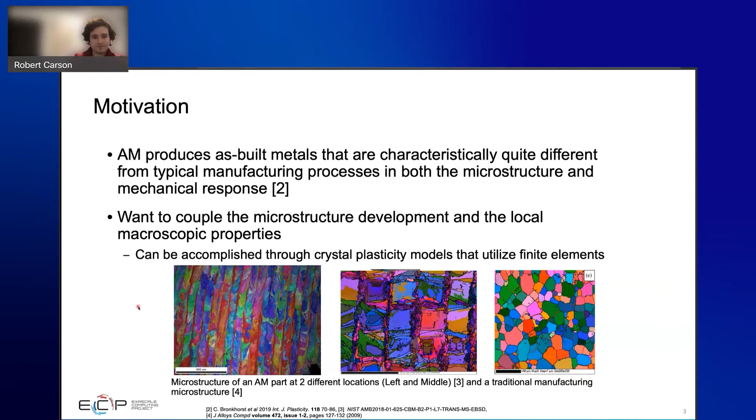And we are able to calculate those using micromechanical type models. And from our local properties, how that affects our part scale builds and the responses from there. So the overall goal, eventually once we have this kind of workflow, is to also help the qualification of AM parts. That's the long-term goal of these set of tools that we're building. So we're hopeful that we're able to get there with the new exascale computers that are going to be coming online.

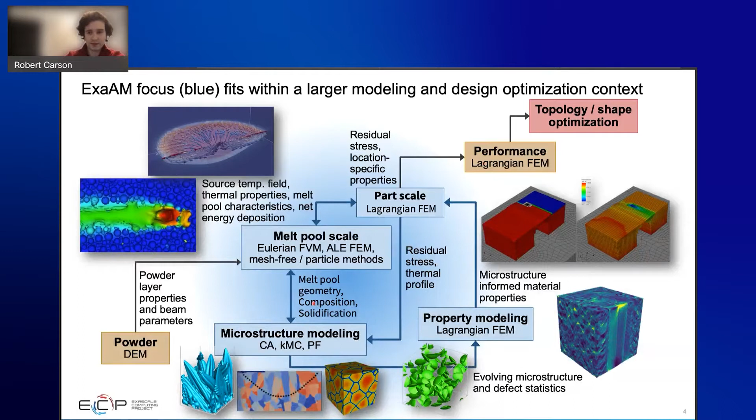So a typical ExaAM simulation consists of roughly 5 different stages. We have a stage 0 where we do a rough simulation of our part builds using the thermomechanics of the initial part build. And that's going to be used as initial conditions for the various thermal fluid solvers, which are then going to model the melt pool and all the physics that go along with the melt pool and the various scan paths. And the various properties that you have for the melt pool are going to feed into our grain scale microstructure calculations. So we're going to build up a microstructure during this stage 1.

And once we have our microstructure, we can either do some further processing on it. So we can pass it on to another set of codes to do these late time microstructure evolutions, where you might try to model heat processing type techniques or residual stress type effects on the microstructure to get out what the late time microstructure might be.

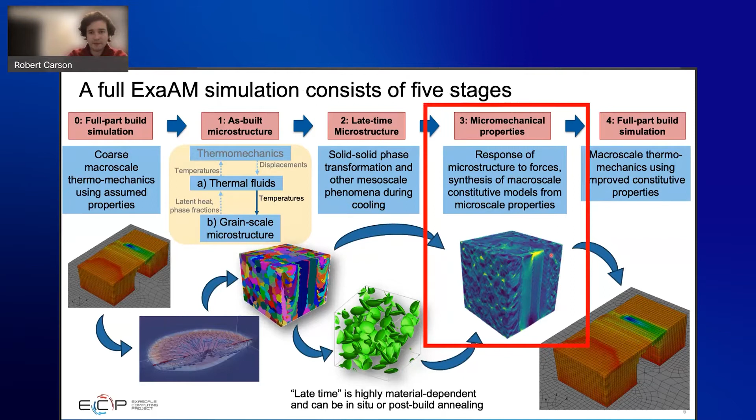Or we can directly bypass that stage and go directly to the micromechanical set of calculations, where we need to load up our microstructure in many different directions in order to probe out the response of the material at that local area, in order to be able to parameterize a macroscopic model that will be used in our part scale simulation. So my work is really focused on this stage 3 here, getting out the local properties so we can have a better informed full part scale build.

So ExaConstit is a relatively new nonlinear quasi-static implicit finite element solid mechanics code. Of course, it's built on MFEM. Development of it roughly began back in 2018, and then it really started picking up in 2019 and 2020 for the ExaAM project, and now it's used in a few other projects as well. So it's started to evolve outside of just the ExaAM project. It's based on an updated Lagrangian formulation, so we're velocity-based for our primal variable that we're solving for. I'll get into our reasons for that a little later.

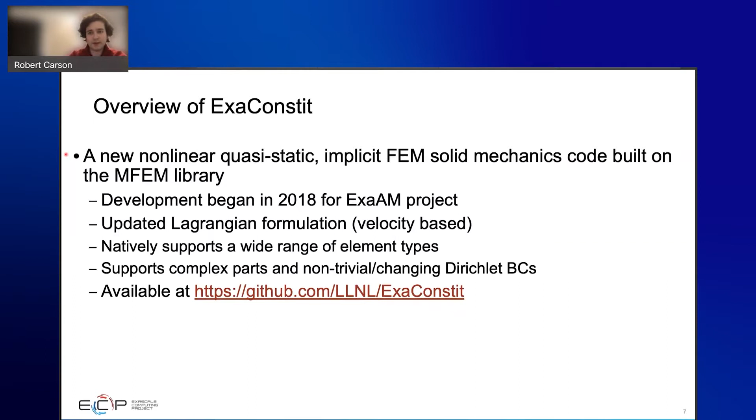We natively support a wide range of elements thanks to MFEM. We're able to support complex parts and non-trivial, changing boundary conditions within the code. And we're also open source and available at the Livermore GitHub page. So since this is designed for an exascale computing project, it's designed with exascale computers in mind, but we still want to be performant even on desktop machines, whether it's your Macs, your Windows, or whatever Linux cluster you might be running on, so you can start doing research type problems with it as well.

We're always looking at adding new features, workflows, and post-processing tools. A lot of this is also dependent upon what our users' needs are, so we prioritize different features depending on what our main users need. Since we're looking at a lot of crystal plasticity type simulations, our bread and butter is going to be crystal plasticity type problems. And for these crystal plasticity models, we actually use an external library also developed initially through the ExaAM project called ExaCMech.

We've open sourced that library as well for those who are interested in crystal plasticity type models. We have that, and you can use that for things outside of finite elements as well. I will mention that the models that we have in there can be upwards of 75 to 90 times faster than comparable crystal plasticity type simulations within Abaqus that make use of UMATs, and one of the reasons why is because we can run on the GPU.

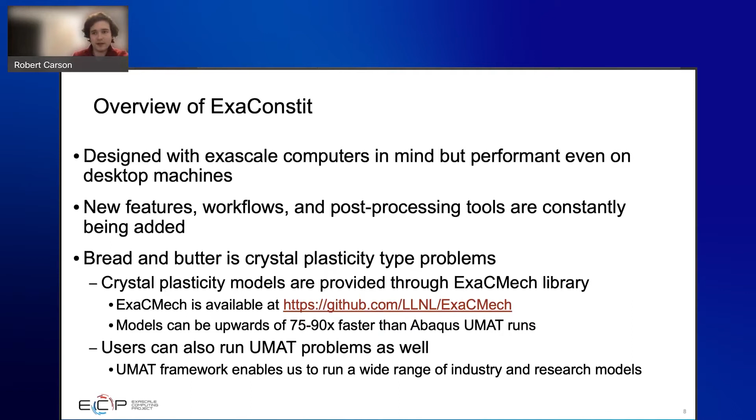So just to give a brief overview of what a typical model looks like for crystal plasticity, I'm just going to cover this briefly. Don't worry about the details too much, but I just want you to be aware of the kinematics and physics that we're solving for. So we're a large strain single crystal elastoviscoplastic model with a small deviatoric elastic strain.

What this more or less breaks down to is our deformation gradient can be multiplicatively decomposed into an elastic and plastic portion. For those of you who aren't familiar with the deformation gradient, it's simply a mapping from your undeformed configuration to a deformed configuration. So we can multiplicatively go from the plastic to the fully deformed using

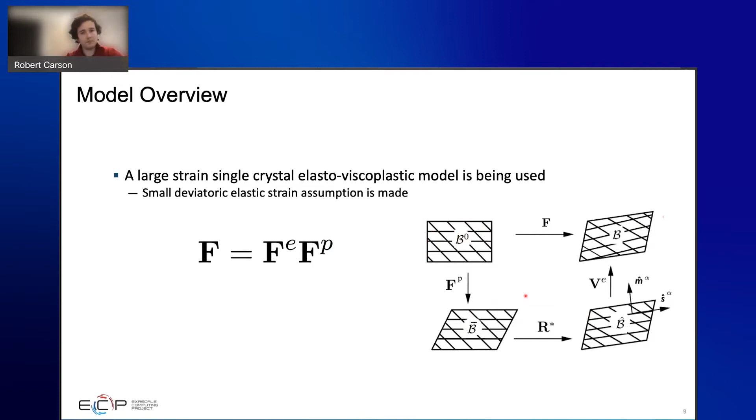So one of the things though is, a lot of people, once they have the deformation gradient, they'll go and do what they need with it. However, our constitutive equations for the plastic flow depend on us further developing our kinematic decomposition. So we actually need the velocity gradient. The velocity gradient is the time rate of change in the deformation gradient, and it's given in our first line here in the current configuration.

We can also describe the velocity gradient in this B hat frame here as L hat P, which is made up of a spin term of our lattice and the rotated portion of our plastic velocity gradient. And our plastic velocity gradient, which is given in this line here, is directly related to the combined shearing of our slip rates on our slip systems.

And our slip rate can be described using various different equations, but for a lot of the stuff that we're doing here, we're just going to be making use of a basic power law, where for example, tau here is our resolved shear stress on a given slip system, and G is our critically resolved shear strength for a given slip system.

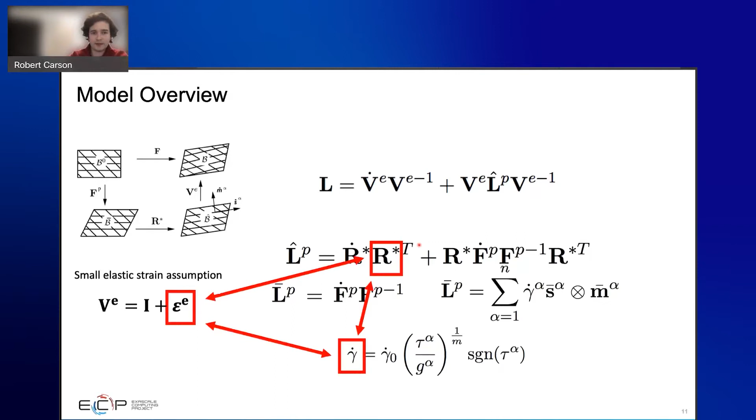And I mentioned earlier that we have this small elastic strain assumption. You can replace your elastic left stretch tensor with this set of equations here, and you can simplify everything even further down, so it's all represented with your elastic strain. But the reason I want to bring this up is to highlight that the evolution of our elastic strains, lattice rotations, and our slip rate are all dependent on one another.

Due to this fact and the fact that some of our set of equations are highly nonlinear, solving for the updates of our states can be quite computationally expensive, and a bit more expensive than your typical constitutive equation for your models.

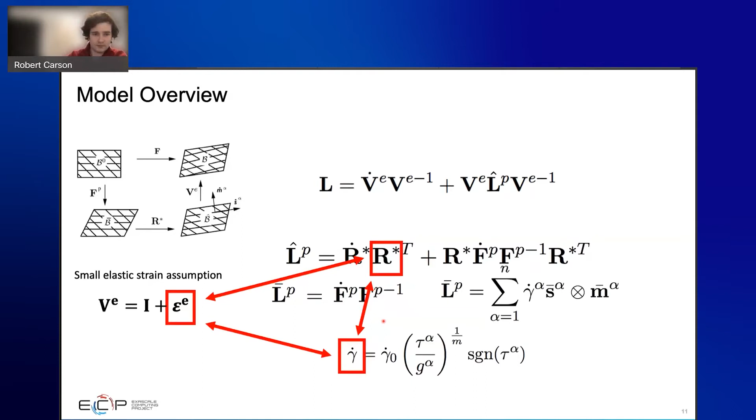So now that I've covered the basic models, I just want to cover the basics of our finite element formulation. We're really not doing anything crazy here. It's just your typical nonlinear solid mechanics finite element formulation. For those who aren't as familiar with what the nonlinear form might look like, it looks quite similar to what a linear elasticity type formulation might look like.

I mentioned earlier that we're making use of an updated Lagrangian formulation. What this means is that our mesh nodes are always in the current configuration. And because of this, we really want our primal variable that we're solving for to be the velocity field rather than displacement. So this is a slight variation, but it's mainly due to the fact that, for our kinematics, it's a lot easier to describe things with the velocity field rather than the displacement field.

And then, of course, for our updates for our mesh nodes, we're just doing a simple integration scheme here, so nothing crazy. So, like I said, a lot of the things that we're doing here are fairly simple. It's more our constitutive equations that are more complicated. So our finite elements are pretty simple, relatively speaking. And due to that, we're able to make use of a number of different formulations when we're looking

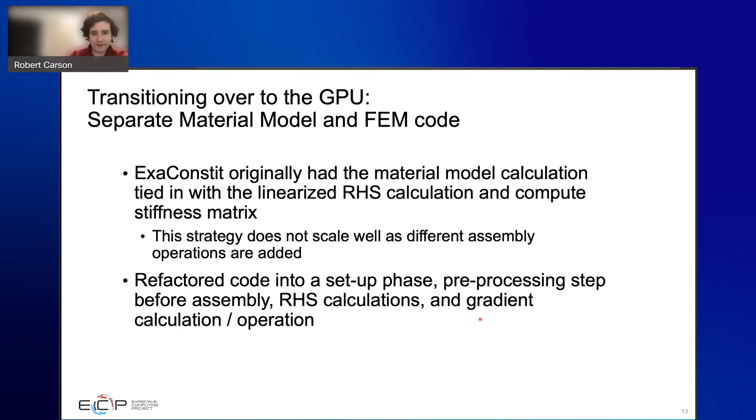So I'll just briefly mention what our setup phase looks like. During the setup phase, we're calculating the necessary parameters to use within our material model. So we need to get everything that we might need in our material model from our mesh and our displacement and velocity fields. Then we have a pre-processing stage for our material kernel, calculating all the things that we need for that. We have our material kernel stage where we run our material kernel, and then we have a post-processing stage for our material kernel.

During this stage, you perform whatever steps are needed to take what you've gotten out of your material kernel into a format that can be used by the rest of the code. For the pre-processing and post-processing steps, we make use of MFEM forall loops for parallelization abstraction. This made things really simple because we didn't have to worry about having a lot of duplicate code for various different parallelization strategies.

However, for our material model, we left it up to the library to decide its own parallelization strategy. For ExaCMech, for example, we make use of RAJA internally, and that's allowed us to support a lot of different parallelization strategies, such as host, OpenMP, CUDA, and HIP. So I'm definitely a fan of RAJA.

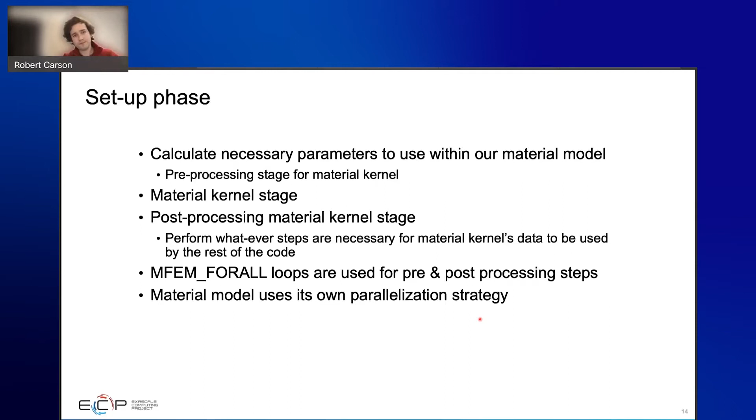We have also done a partial assembly formulation, I will mention. However, I figured it'd be best to go over our most efficient formulation for our set of problems. For that, we looked at an element assembly formulation rather than partial and full assembly, especially to get on the GPU. So we went back and looked at a lot of the original literature for the solid mechanics

field. And it turns out that back in the 70s and 80s, there's a really nice set of papers that were written that said, all right, here's how you want to do things efficiently so you're not hitting memory bandwidth limits, and you're really able to take advantage of the machine. So we didn't have to start from square one. We were able to make use of those papers.

So for the internal force, we just make use of a partial assembly type formulation. We split this down into the below, where this is the summation over all your quadrature points and elements, but it's just the determinant of the Jacobian, the weight of your quadrature points, the gradient of your isoparametric shape function, and the adjugate of your Jacobian times your stress tensor. So nothing complicated there.

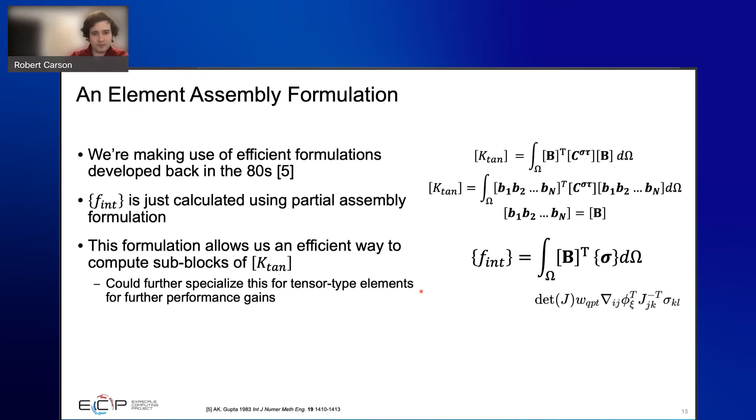And then I will just mention that for another set of integrations we've done, we also added incompressible material support within ExaConstit. For this, we were just using a very typical B-bar type formulation. Due to this, the shape function gradient became a bit more complicated, and so our integrator also became more complicated. This required us to be a bit more careful about how we implemented everything to make sure everything was done correctly. But that's all within ExaConstit. It's all up and running.

The nice thing about this is it's able to bring our linear hexahedron element response much more in line with what we see from higher order elements. One of the nice things, at least when you're running on the GPU, is the runtime between your full integration approach and this incompressible integration approach is roughly the same, which is a nice bonus.

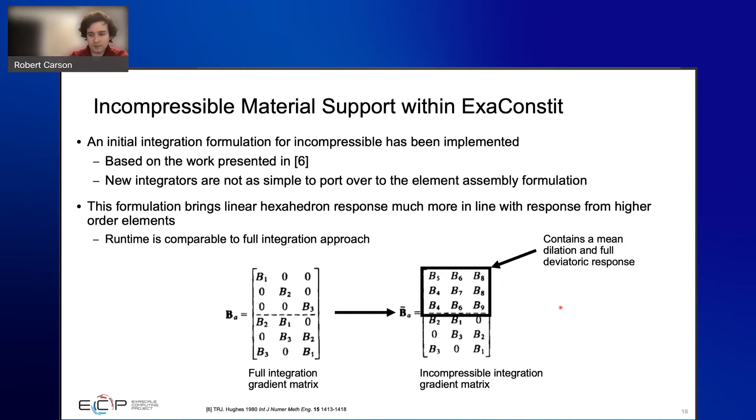If we look at our element assembly itself and do strong and weak scalings, we can see that we're not doing too well in the strong and weak scaling regime, and part of this is due to the large startup cost for our simulations when reading in our mesh and partitioning it. However, I'm pretty hopeful that recent work done within MFEM will drastically improve this area, and I expect us to have even better strong and weak scaling. I would like to thank Veselin for that work. I very much appreciate it.

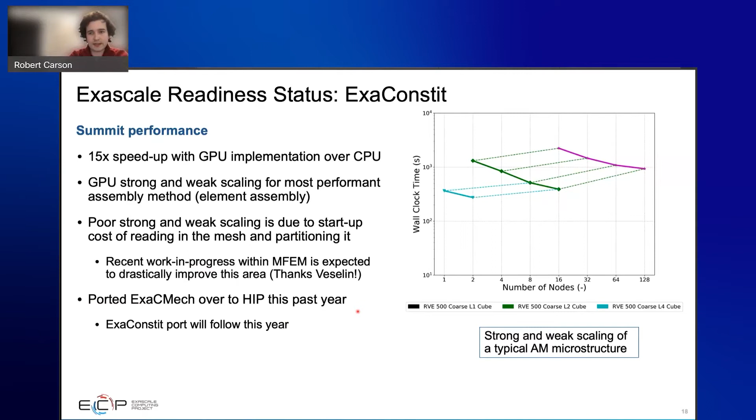Also, we've been porting ExaCMech over to HIP this past year. We have it up and running on the early access machines, and we're currently working on the ExaConstit port, and I expect that to be done probably within the next month or two.

And talking with some of the members from the MFEM team, we believe this might be partially due to the fact that for the MPI libraries, the device-to-device calls aren't the most performant. Or at least this was a year or two ago when I was talking with them. So there's probably some gains that can be made here, just from having more performant device-to-device calls.

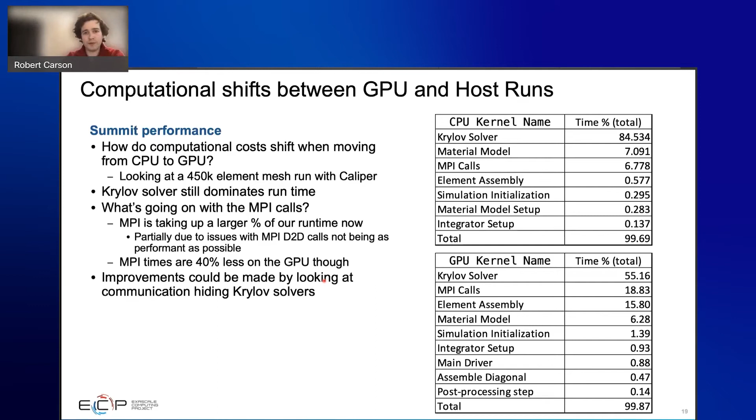So now that we have this nice performance code, what are we going to use it for? What do we really need it for? So, within ExaAM, I've mentioned that we need these local properties to be calculated throughout our parts. And each one of our local properties type calculations requires us to run a ton of different crystal plasticity simulations under varying load conditions, temperatures.

And the reason to do this is because we really can't get away with just running one simulation for an AM part. If we look at our deformation field over here, it's very complicated. There's a lot going on, and our response from our material is anisotropic, so it's not a nice isotropic type behavior where you can assume the response is equal in all directions. And due to this fact, we're wanting to parameterize a macroscopic model, a more complicated macroscopic model than something like a J2 model. And I'll get into that a little bit later.

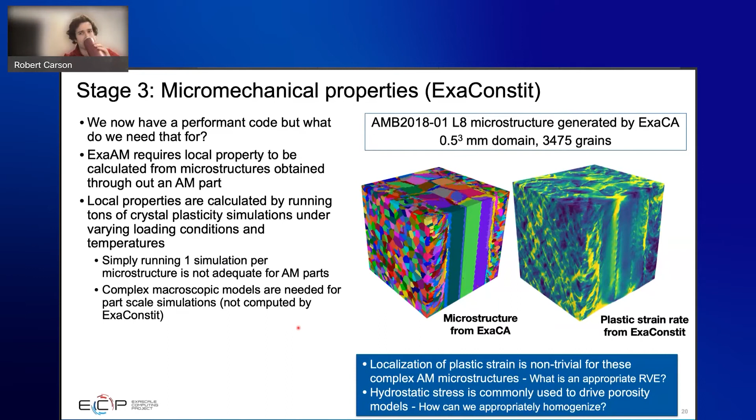But first, one of the things that we need to do before we start running all these simulations is talk about what a representative element is for our part, or for our microstructure that we'll be using during all these simulations. So back in 2020, we ran a set of studies where we used the similar scan patterns from the NIST AM Bench problem, which is the problem that we're trying to simulate within the ExaAM project.

And what we did was, we had the same scan patterns. We generated a microstructure using ExaCA, which is our cellular automata code that we have, which is also open source, I'll mention. And then we ran a fairly large sample that's about 500 micron cubes. We made it very well resolved with roughly 27 million elements within this cube.

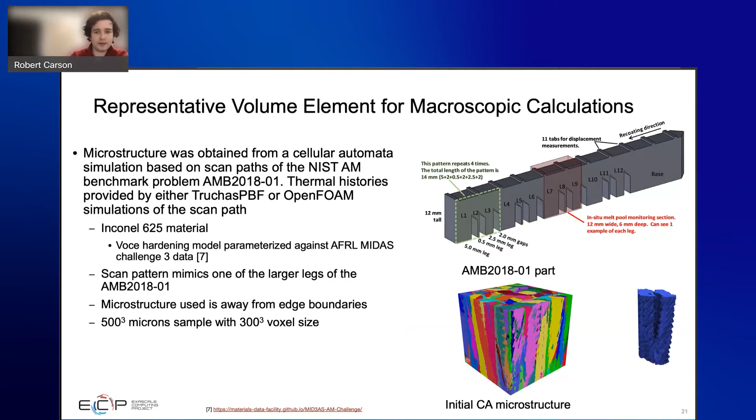And then we looked at what happens when we decrease the domain size and decrease the amount of grains that we had within each one of the domains. So we decreased it by thirds each time. So we went from 500 microns to 330 to 166 micron cubes. And I'll mention that even though we were reducing the domain size, we still had fairly well-refined meshes. Even the small microstructure down here still had 1 million elements in it.

And the first set of simulations that we ran, we only took things out to 5% strain, just because within our projects, we're not really concerned with large strains, due to the fact that we're really looking at that elastoplastic transition region in our material. So we don't really have to go out to large strains in order to examine that.

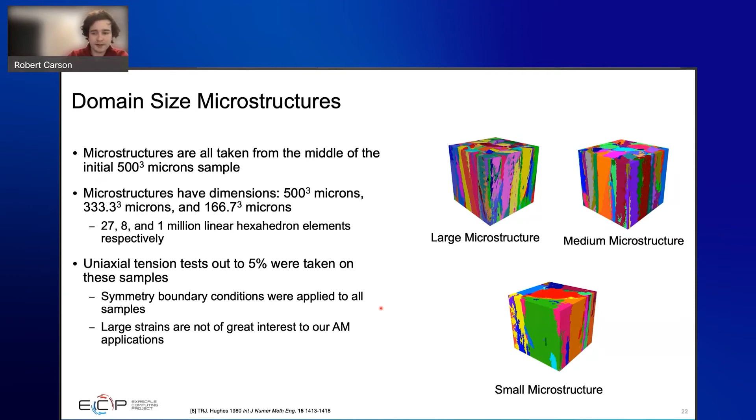So when we did that, what we found was this medium cube was below 5% error for the entire loading history. So our representative volume should be somewhere between the medium cube and the large cube, just because we do see the errors growing as the sample starts entering fully developed plastic flow. But if you really wanted to, we could potentially get away with something that's a medium cube. And the reason why I mention that is the small cube didn't start out too well. It started around 6% error at the beginning, and then it just continued to grow that error as you got further and further out.

And I will mention that the main difference between all of these responses was largely driven by the crystallographic texture between the materials. I'll get into a little bit later what crystallographic texture is, but you can think of it as a directional dependency on your material response. So it's quite important when you're modeling materials, especially when you're doing something that's not necessarily isotropic.

As part of the study, I also looked at effects of mesh coarsening because, let's face it, not everyone has access to a supercomputer, and they can't run a 27 million element simulation just like nothing. So I wanted to look at what happens when we start coarsening these meshes to something that would be more reasonable for research labs that don't have access to these large machines.

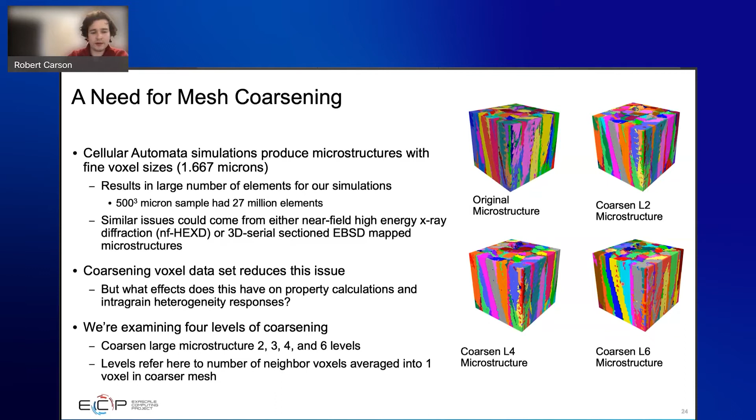So, when we look at the macroscopic response, more or less all of them were the same. We only saw 3% deviation between all the different cases. And this was largely due to the fact that the crystallographic texture was largely the same between them. If we were just concerned with the macroscopic stress strain curve, this tells us we can get away with fairly coarse meshes if we need to.

However, as part of this project, we're also interested in potentially looking at porosity type models or parameterized porosity type models with our macroscopic simulations. And because of that, we want to use something that's not super coarse, because we want to capture the distribution of our hydrostatic stress within our material decently well. So we really don't want to coarsen it so much. So that kind of answers the question about our RVE.

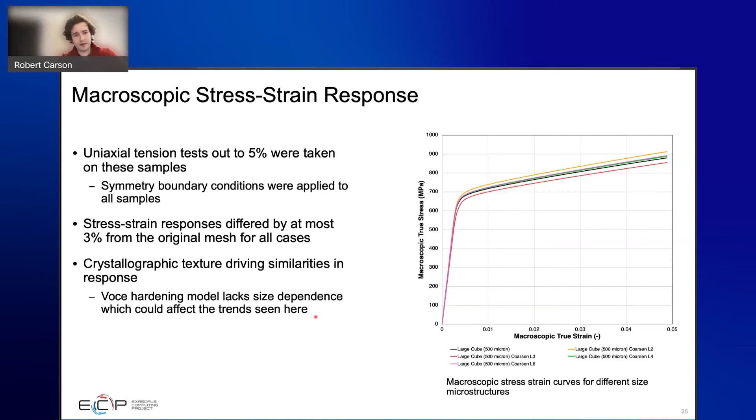But as I mentioned earlier, we don't really want to use a J2 type model. And the reason why is, as we saw earlier, this strongly textured effect in our material. J2 models just don't do well with that because they assume everything's isotropic. And when you're looking at macroscopic type models, there's a lot of different ones out there.

And this is due to the fact that within manufacturing, people wanted to model things such as rolling processes for sheet metals, because they know sheet metals have a very textured response that's very orthotropic-like. And another area, for example, is these as-built materials, which also have a very similar orthotropic type response, in the build direction and then the transverse.

However, you can mitigate some of that texture response if you do post-build heat treatments and manufacturing processes such as HIP, which can get you to more uniform texture type responses. Another reason why you might be interested in some of these anisotropic responses is it can also be advantageous to the performance of your part. You may not need an isotropic response. You can actually design it to be more anisotropic. And that's what they do in composite type builds all the time.

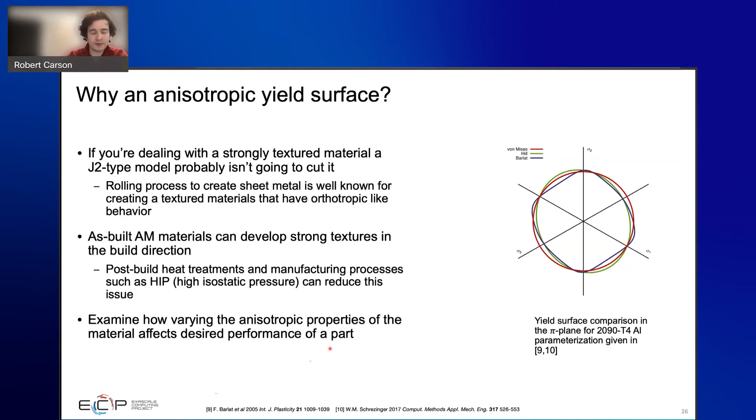As I mentioned, there's been a lot of research in these anisotropic yield surface type models. And one of the people who did a lot of work on this was Barlat and several of his associates. Over the years, they've done a lot of work to better model sheet metal forming processes, because people really don't like wasting material. So having a better model for how the sheet metal forming goes really helps.

So he created a model called the Yld2004-18p model, which is a really clever name, I know, but it's just because it came out in 2004 and it has 18 parameters. And this model is largely orthotropic with some out-of-plane behaviors that it's able to capture. Some of the nice properties of it are that it can reduce down to several famous models, such as J2, your Hill yield surface, and your Tresca yield surface models.

So for the ExaAM project, that seemed like a pretty good fit for us because we can use it to model these anisotropic behaviors, and then if we want to, we can also use this exact same model to drop down to some of the simpler models to see what our different responses are.

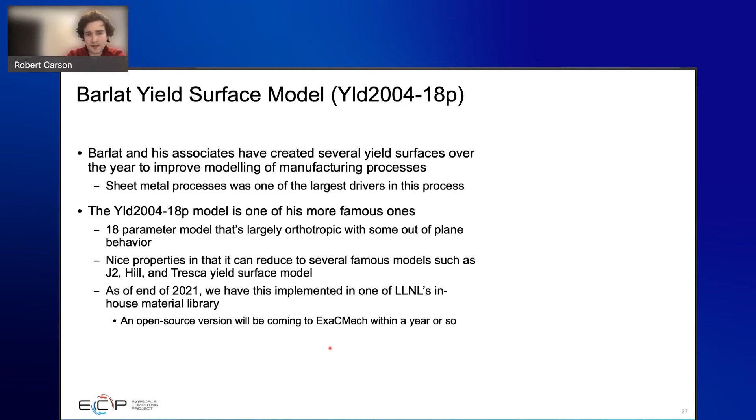And I will say that the past year, I spent a lot of time implementing this model into one of Livermore's in-house material model libraries. We have that up and running now, and I do have plans of actually having an open source version of it within ExaCMech within the next year or so, so people will be able to use it.

So how does this anisotropic yield surface model fit within the AM workflow? The Barlat model traditionally has been parameterized using experimental data. However, this data is typically not cheap or easy to obtain. But when you think about it, simulations are pretty cheap, relatively speaking. You just have to run a bunch of them on a cluster. They're not too hard. So because of that, crystal plasticity simulations come to the rescue here. So we don't have to run all these expensive experiments if we don't need to.

So ExaConstit is going to drive all our simulations along with some workflow tools that we've written in Python. And I'll mention that these workflow tools that I'm going to talk about in the coming slides, I do have plans to eventually include them in the ExaConstit repo, but we're just cleaning up and finalizing them. But you can contact me if you're interested in them, and I'll see what I can do to get them to you sooner.

And then our microstructure is provided by an outside code called ExaCA. That's also up on the Livermore GitHub page. It's able to generate these nice microstructures for us. And then for optimization type things, we're just using simple SciPy optimization functions, although I'm sure people who are more familiar with optimization could probably suggest better frameworks for the type of things that we're doing.

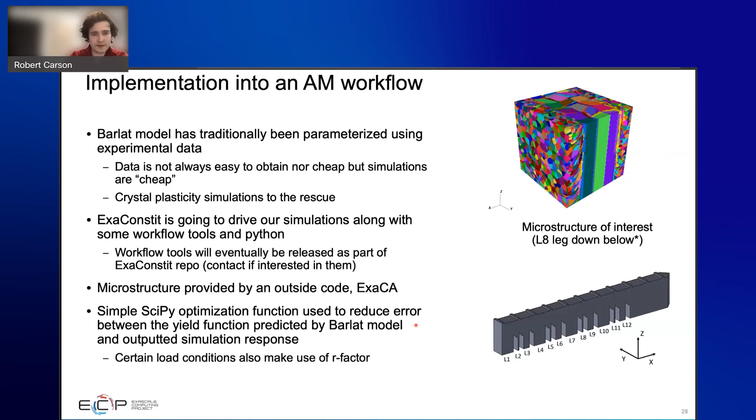So our workflow for connecting stage 1 to stage 4. The local property calculations can be broken down into 3 different stages for each RVE. We have a pre-processing stage where we take in our microstructure, do some processing of it, get out a mesh, and then create a test matrix. We then pass all that data over to our simulation stage where we have a job generation script that generates all the jobs that we need and then runs them all.

And then once we have all those simulations run, we're able to slurp up all our results and optimize our microscopic yield surface parameters using those results. And then we're able to repeat that process for each different temperature we're interested in. And then once we have that, we can feed these parameters into our macroscopic part scale model if we need to. And of course, you can repeat this step for each RVE. And each RVE is separate from one another. They don't depend on one another.

So this workflow can really scale out and is what I think you'd consider an embarrassingly parallel workflow. So we actually worked with the ExaWorks team on this workflow for the ExaAM project, and what they helped us do was swap some of our LSF job scripts over to Flux. And due to moving from LSF to Flux, we actually saw a 2x improvement in our job turnarounds, which is a huge win, especially when you're wanting to run potentially thousands of simulations on a system like Frontier.

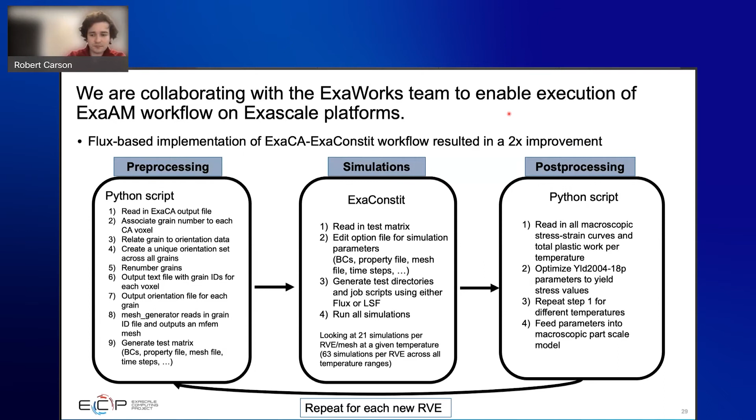So I'm just going to get into some of our steps, just because I think it might be of interest to some people in the crowd. So for a pre-processing step, yeah, it's pretty simple. So we have a command line interface script that takes in the microstructure, it generates a mesh, and then it pretty much just creates a test matrix.

You can provide it multiple temperatures and their corresponding property files. It can coarsen the microstructure if you need it to, and then it can also generate the test matrix, which will later be slurped up by the job generation script. And this is just kind of what a stereotypical command line interface might look like when you're doing it.

So it's fairly simple. The mesh generation, it's very simple. It's just calling out to an external executable, which, we'll also mention, is based on MFEM. And this is generated by the ExaConstit library as well when you build it.

And then our test matrix, I didn't include all the code just because it's not super relevant, but it's pretty simple. It's just essentially a Pandas data frame that we created, and we save off as a CSV file, and then we'll later just slurp it back up again as a Pandas data frame during our job generation script.

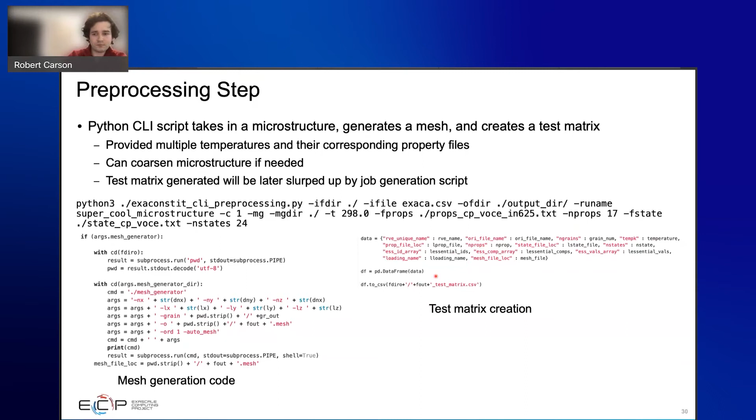So this is actually something that I think is kind of neat. It doesn't actually take a lot of lines to create something to generate a lot of jobs for you. And I was able to make a nice, simple job generation script that takes in our test matrix, that takes in a master option file, and then kind of a job submission file for you.

And then it goes and has each simulation in its own unique job directory. And within that job directory, we have symlinks to all our shared original data. So we're not thrashing the file system, copying a lot of data across. We just are pretty smart in using the symlinks.

Our master option file has just some simple regex searchable expressions in it that can then be replaced by values from our test matrix. And then we're internally able to support either LSF or Flux type job submissions. And, for example, swapping between LSF and Flux only required 5 additional lines of code. And we could just as easily also extend this to SLURM systems as well.

And then finally, it generates a master job script for you that you can then have it submit all your jobs for you, or you can tweak it a little bit more if you want to.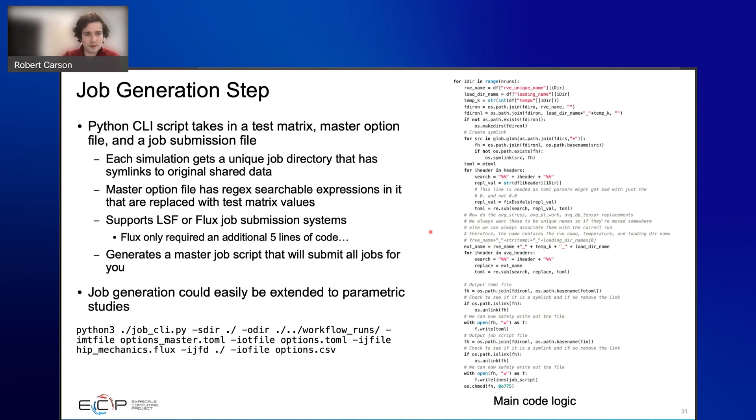So once we have all these jobs, we're able to run a ton of simulations at once. And from all the simulations, we get out a ton of data, along with the stuff that we need from our microscopic model. And some of the nice things that we get out from these are some pretty interesting visualizations of the deformation of our AM material. And I just wanted to show a couple of videos of the various different loading conditions.

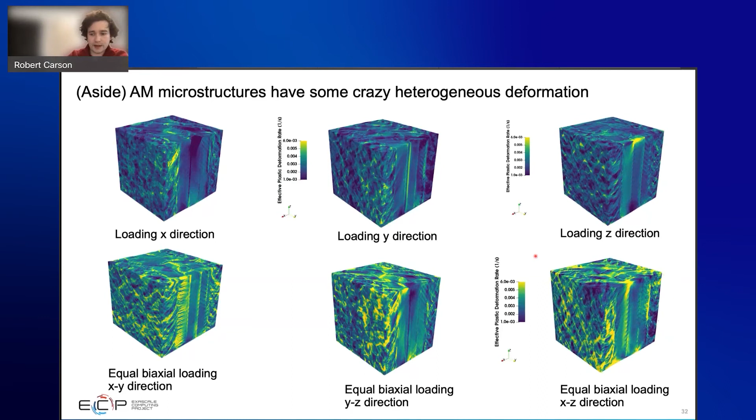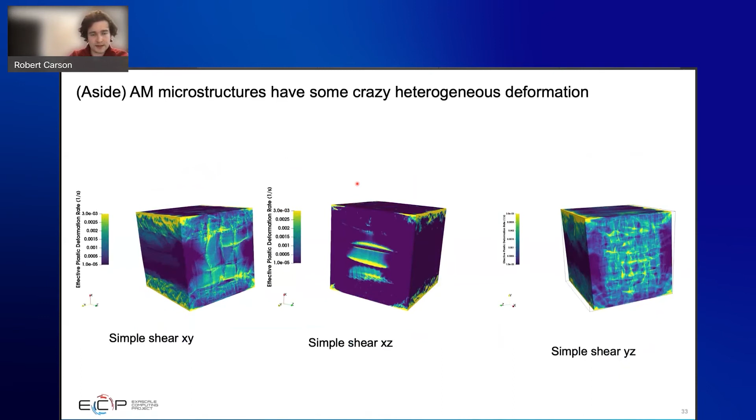And we can see that the deformation is rather complicated. So once again, this is just showing the importance of looking at an anisotropic yield surface. And these are also some of my favorite videos, the simple shear ones that I thought I'd share, just because the deformation you see develop in them is pretty crazy. And it's definitely not uniform. Yeah.

So lastly, I'll just briefly go over the optimization procedure; it's pretty simple. For each RVE, we kind of load up the necessary data and then calculate what we need to feed in our optimization script, and then we just let our simple optimization function do what it needs to do. And that usually takes a bit of time, so it's usually a great time to go grab some coffee or do some other work.

And then we can repeat this procedure for each different temperature for our RVE, and we instantiate the initial parameter set for the macroscopic things using our previous temperature as initial guess. That usually helps speed along our convergence a bit faster.

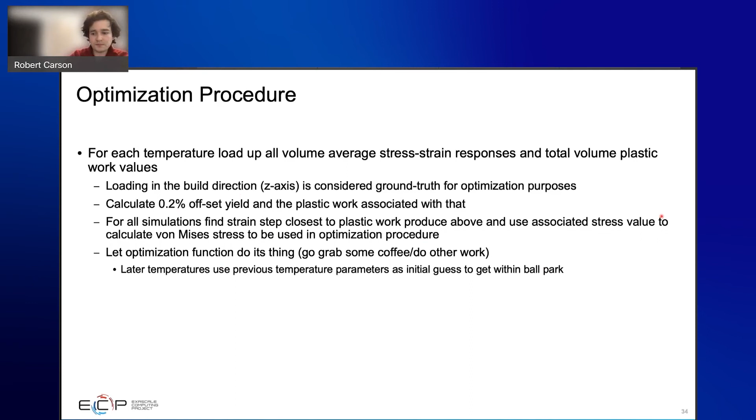So that's pretty much it for the ExaAM type things. We have this workflow up and running, and we're able to run the simulations that we need to now. So I figured it'd be good to also mention where ExaConstit can be used outside of just the ExaAM project.

So some of the areas: you can use it to quantify variability in microstructure effects on the material response. You can look at it for fatigue applications in order to understand deformation mechanisms at the microscale. This is also a very important area for research. You can use it to create better material models to capture single crystal behavior, for example.

You can use it to model geological materials to better understand how Earth's lower mantle deforms. You can use it to couple experiments and simulations by using techniques such as forward diffraction techniques, or you could just use it to model such things as texture evolution of materials over large deformations. So I'll get into a couple of these real quick.

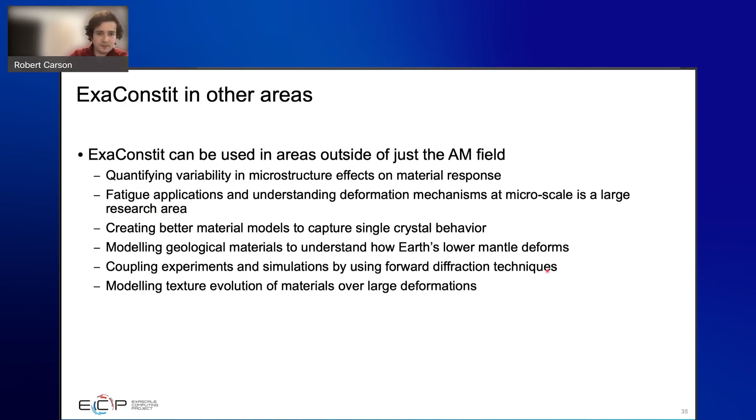Aaron, how am I doing on time? You're a little bit over, but like I said, we've scheduled an hour and a half for this, so... Okay, it's 10 to the hour.

Okay, so I'll probably skip over some of these, but I'll just mention the variability. So while we did do this one for AM processes, I'll just mention that varying processing conditions can lead to, of course, different microstructures, which can affect the micromechanical response of the material. And if you want to study all of this, it's a very wide parameter space, so you're usually best off to only focus on a few aspects when you're varying processing conditions.

So Matt Rolchigo, who's a member of the ExaAM team, led up the study of varying the parameters for the microstructure processing conditions using ExaCA, and it generated a bunch of different microstructures. And I helped look at what the difference of the micromechanical response was from these varying microstructure conditions.

So during the study, he looked at varying the AM substrate diameter, so that's your base plate's grain sizes. And then he looked at varying the nucleation rates for your grains and how that affects the microstructure. So he got a lot of different microstructures depending on how the parameters were varied.

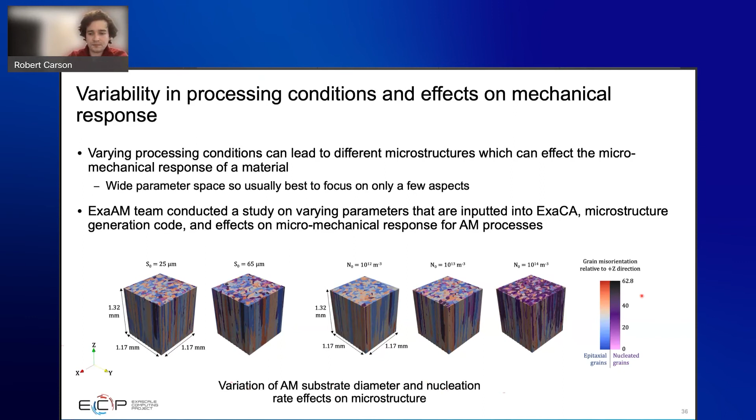But one of the things that we found was even though we varied a lot of these, and there were some large differences in the average grain diameter, you really only saw minor differences in the stress-strain response in this 5% strain that we're looking at. We only saw a 6% max difference between the min and max response when we were just looking at the macroscopic response. Although we did see a much larger set of differences when we started looking at the intragrain response, which was expected.

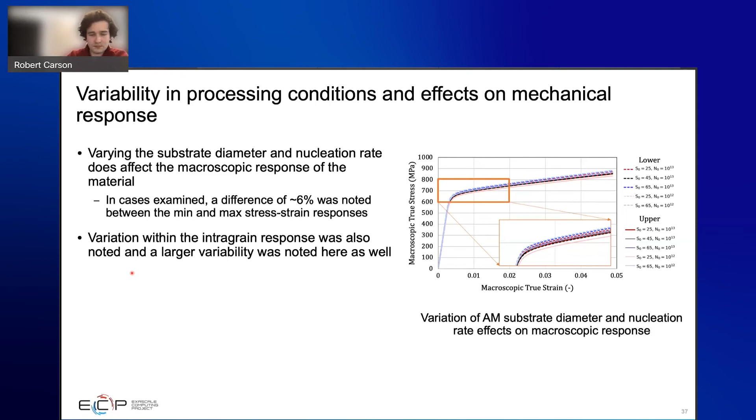Next, I'll just mention that we can also use it to simulate single crystal responses. Capturing single crystal response in metals is often challenging, as traditional crystal plasticity models were designed to capture the response of polycrystalline metals, so they often neglected some of the physics that go on within single crystals. So we have an LDRD set up to better examine this area and are working on promising new model formulations.

But I just want to show, we can model the deformation of single crystals, and we do this doing compression type things. We see some nice buckling form in our materials, and when we actually looked at the experimental data for these single crystals, we actually see that buckling as well. So it's really cool seeing our simulations actually capturing some of these experimental responses.

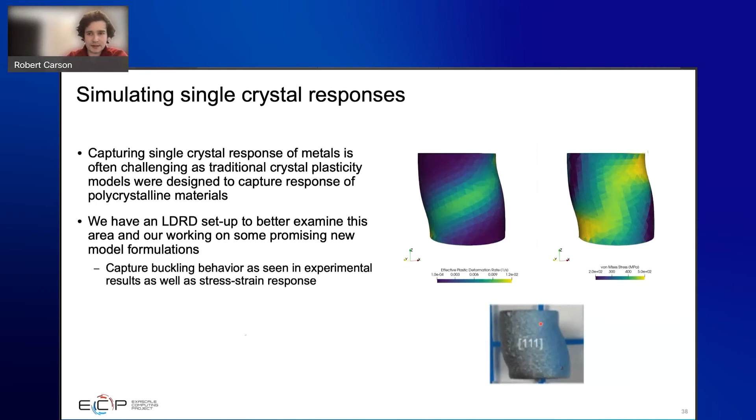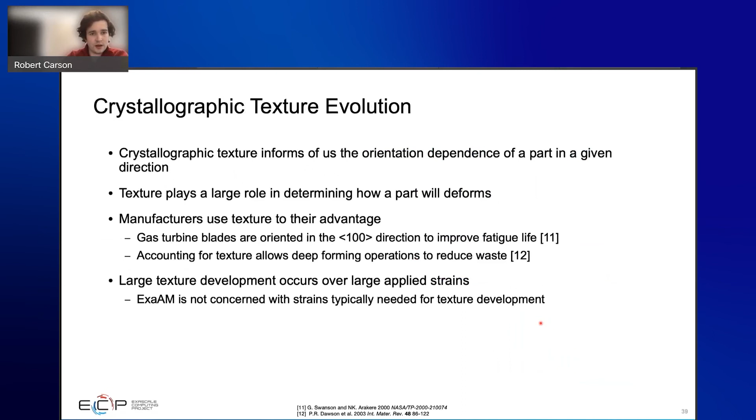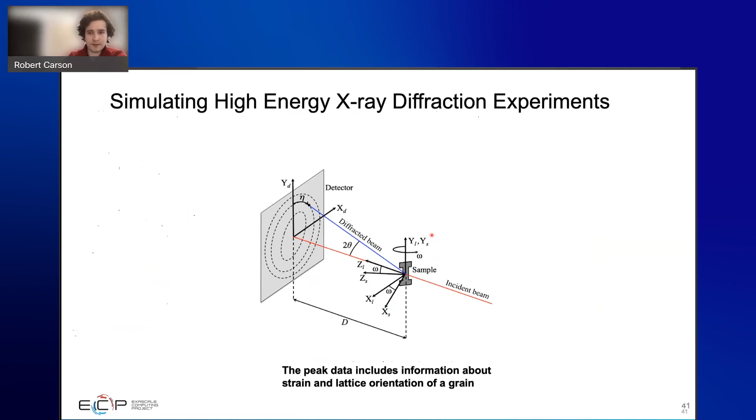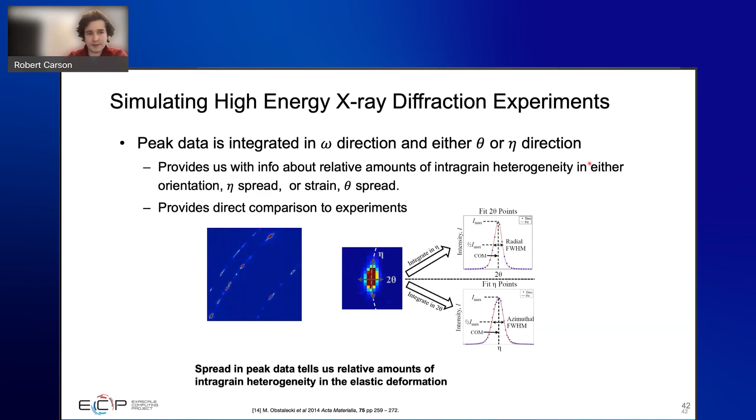Next, I'll just mention that you can also simulate high energy X-ray diffraction experiments. And that's pretty cool because these high energy X-ray diffraction experiments are able to get you at the intragrain heterogeneity for either your lattice orientations or your elastic strains for each grain. It can also give you a few other things as well, but it's pretty cool that you can do a direct comparison between the two if you simulate your high energy X-ray diffraction experiments from your crystal plasticity simulations.

So just in summary, ExaConstit is an open source crystal plasticity finite element code built on MFEM. It's highly performant on systems ranging from desktops all the way to systems such as Summit. We've implemented several different integrators for GPU support and different material models as well.

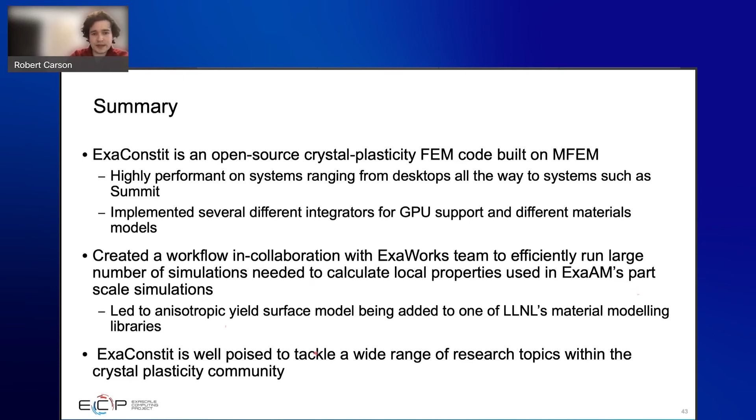Over the past year, we've created a workflow in collaboration with the ExaWorks team to efficiently run large numbers of simulations, needed to calculate local properties in the ExaAM project. And then I'll just mention that ExaConstit is also well poised to tackle a wide range of research topics within the crystal plasticity community. So yeah, that's it. Does anyone have any questions?

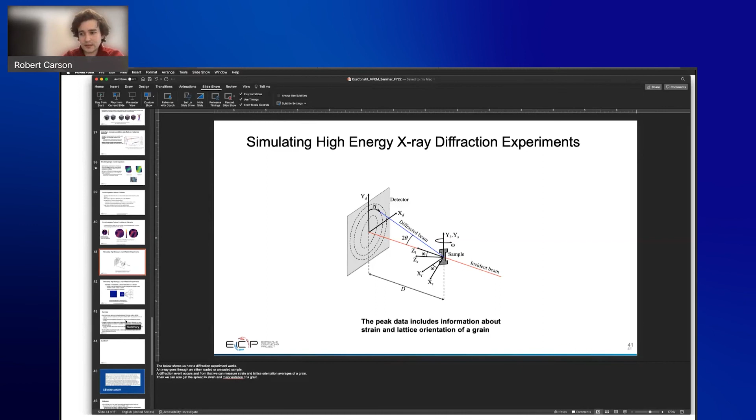Although, of course, when you start looking at more dynamic problems, it becomes much more tricky. And for that, I've looked at different solvers for things, but I can talk to you about that offline if you'd like. Sure. Yeah, sure.